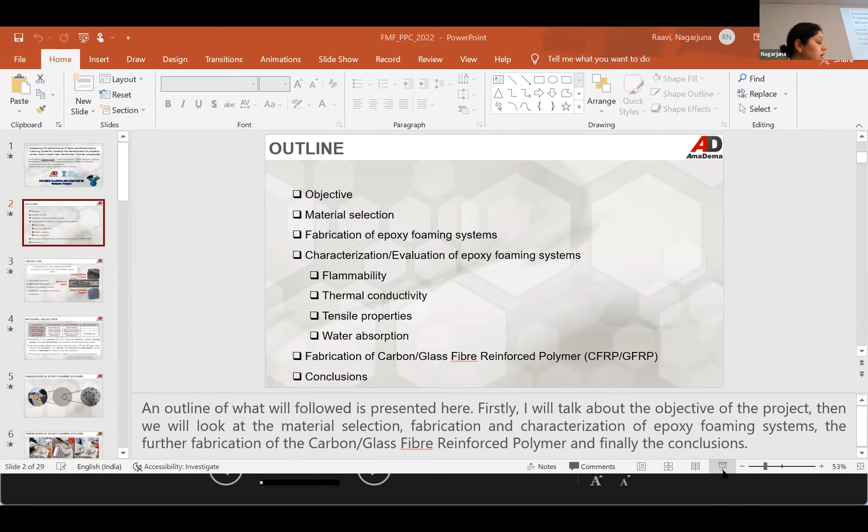To use this. Nope. I have no idea why this is not working. I'm gonna try it again. There we go.

Just a quick outline of my presentation today. I'm gonna give you the objective of this work, then move on to the criteria we've used to select these materials. Following that, I'm gonna talk about the fabrication of these epoxy foaming systems, before I move on to the characterization and evaluation of the resulting foaming systems in terms of their flammability, thermal conductivity, tensile properties, and water absorption properties. Finally, we're going to have a short look at how we can implement these as core materials in fiber reinforced composites.

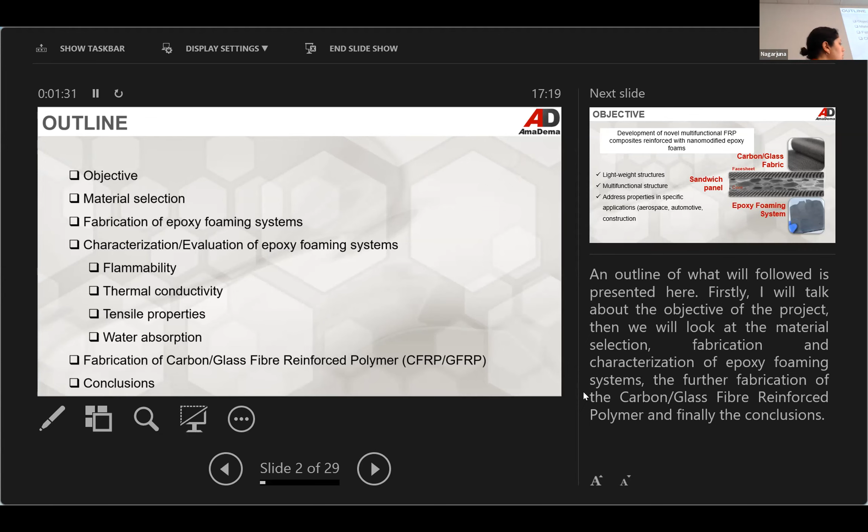The main objective of this work was to develop novel and multifunctional fiber reinforced composite systems using these epoxy nano-modified foams as a core. As you can see here, these epoxy foams with nanoparticles are sandwiched between two face sheets made out of carbon or glass fabric.

The advantage of these structures is that they're very lightweight, yet very strong. They carry several multifunctionalities, and they're typically used to address specific properties in applications such as aerospace, automotive, and construction.

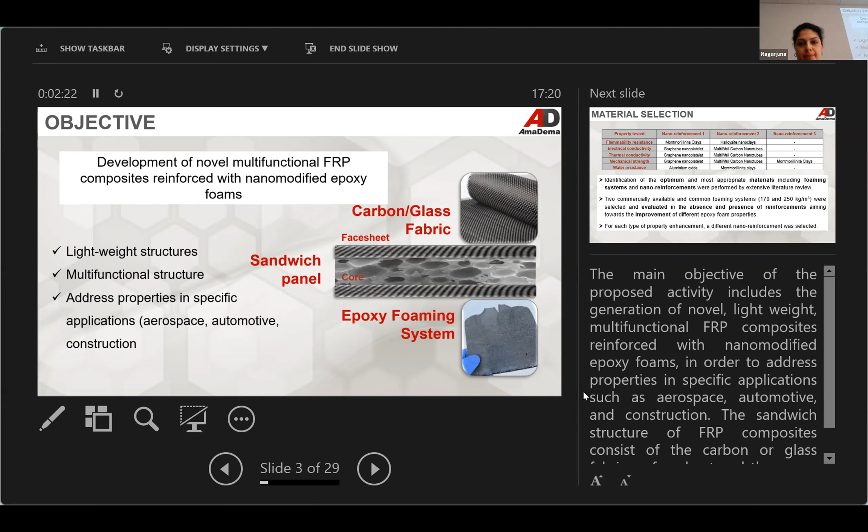Now moving on to the material selection, the scope of this was to identify the optimum and appropriate materials to give us this needed multifunctionality. More specifically, we were looking into the relevant literature to find nanoparticles that could enhance the flammability resistance, electrical conductivity, thermal conductivity, mechanical strength, and water resistance of the resulting foams.

After selecting the applicable materials, we selected two commercially available and common foaming systems with different densities. We've evaluated the performance of these foams in the presence and absence of the nano-reinforcement selected here. For each type of property, as you can see here, we've chosen different enhancements.

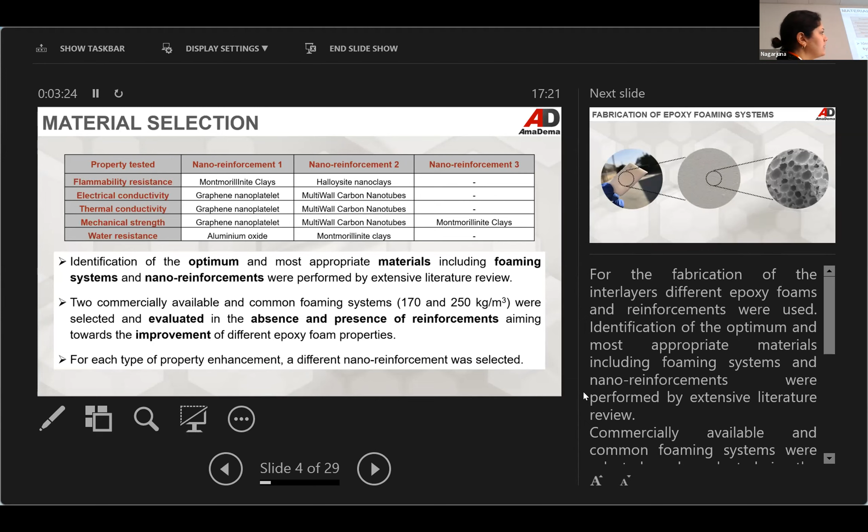In the case of mechanical strength, we actually tried 3 different systems. As you can see here, we're creating this core material, and the SEM images demonstrate that it results in an open cell structure, which is preferable in aerospace applications.

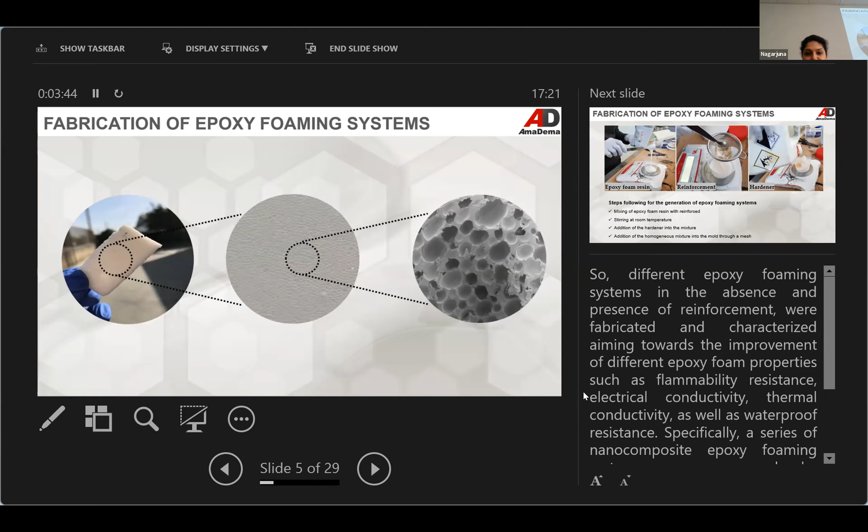Very quickly, the way we fabricated these epoxy foam systems was to mix the epoxy foam system with the reinforcement. We stirred it at room temperature, and added the hardener before transferring this into the mold. What is noteworthy here is that we were using a sieve to add the nano-reinforcements to break up any aggregates, and also using a sieve to pour this into a mold, making sure we eliminate any entrapped gas bubbles that would hinder the homogeneity of the final system.

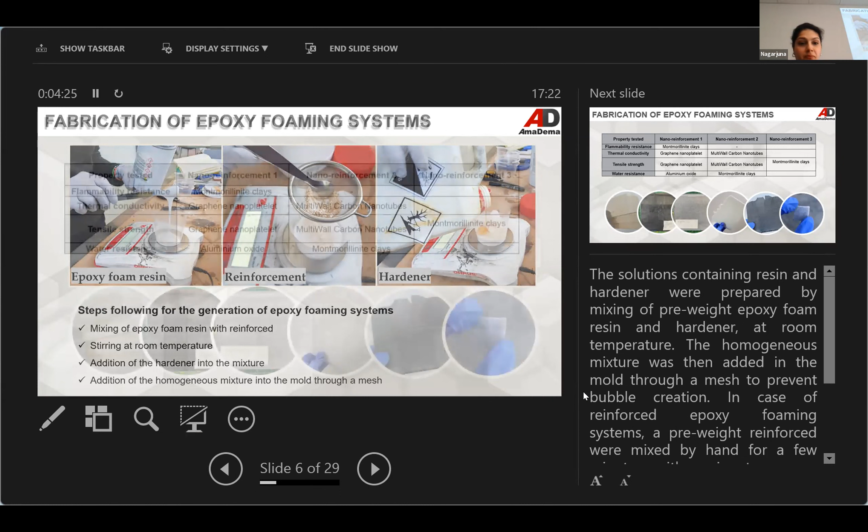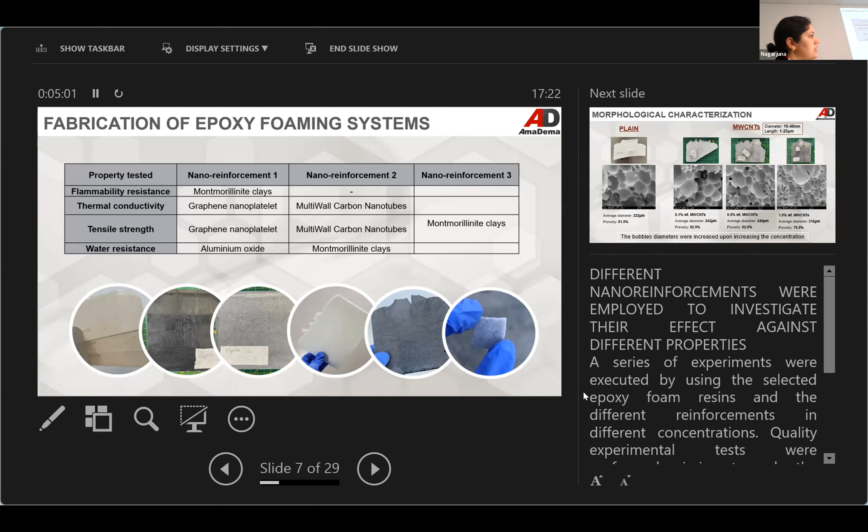Moving on to the morphological characterization, we wanted to investigate the effect of the addition of particles at different concentrations on the morphology of the resulting system. As you can see here, in the case of multi-wall CNTs that have an average diameter of 10 to 40 nanometers and lengths of 1 to 25 micrometers, we observed that the diameters of the bubbles, as measured using SEM,

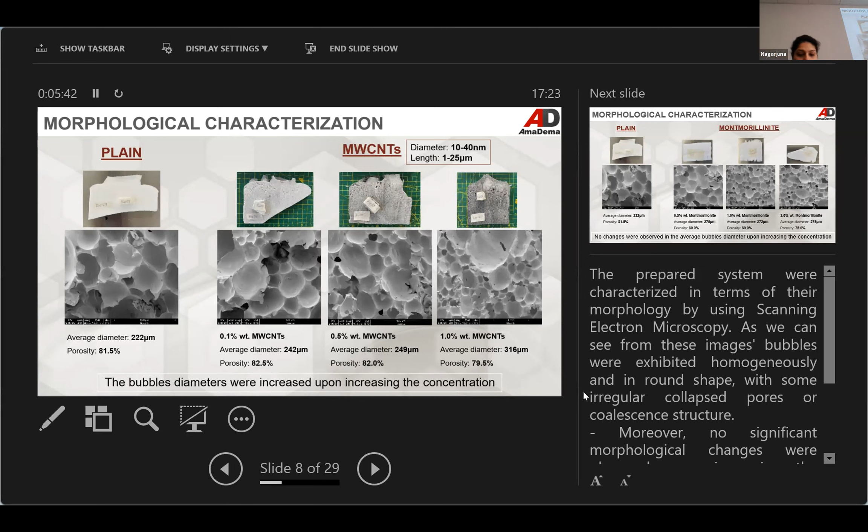appear to increase when we increase the concentration. And the porosity, as expected, drops when we increase the concentration.

Now, montmorillonite nanoparticles had a very different effect. We haven't seen a significant change in the morphological properties. As you can see, the average diameters measured were very similar, and the porosity, as expected, is also very similar.

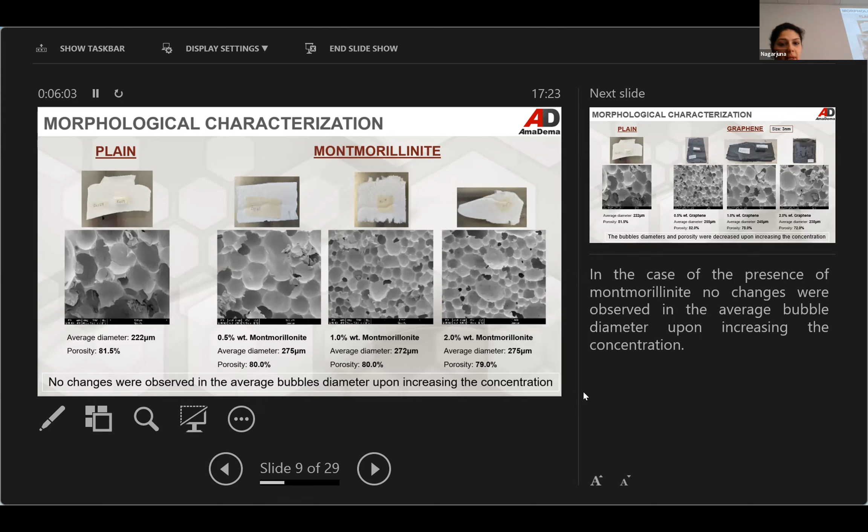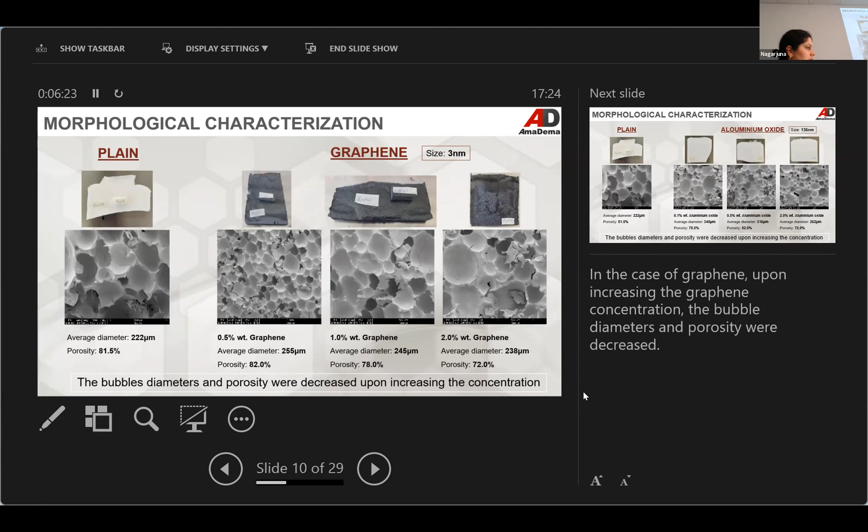Finally, when we use the graphene nanoparticles, keep in mind that these are very, very small nanoparticles compared to the previous particles we've checked. The bubble diameters appear to decrease when we increase the concentration of these nanoparticles.

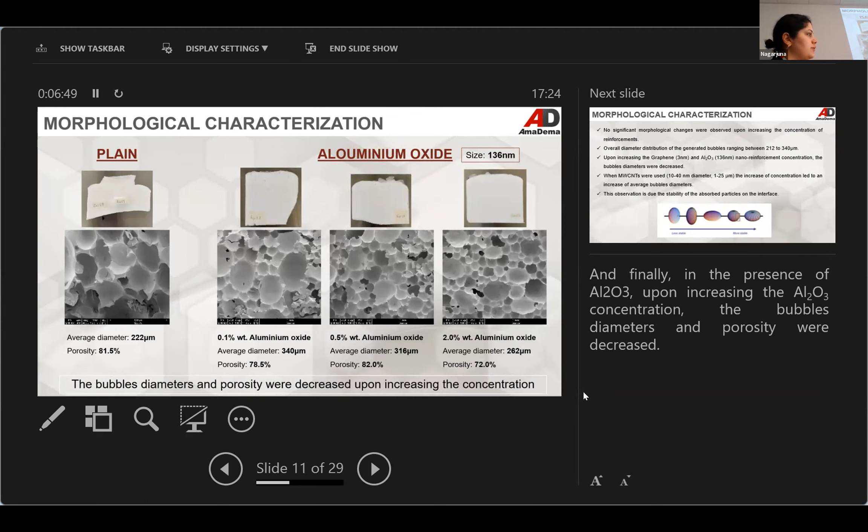And finally, the last system we've used were the aluminum oxide nanoparticles. As you can see, the size is also different here, and here we have observed the largest average diameter in the systems we've checked. Again, the bubble diameter and porosity are decreasing when we increase the concentration of aluminum oxide in the epoxy foams.

Now, a quick summary of what we have observed. We haven't observed any significant morphological changes, meaning that we started off with open cell foams, and what we got was open cell foams. The overall diameter distribution ranges between 212 to 340 micrometers. In the case of graphene and aluminum oxides, we have observed that the bubble diameters decrease. In contrast, when we incorporated multi-wall CNTs, we've seen that the average bubble diameter actually increases.

We have attributed this effect to the shape and size of the incorporated nanoparticles and their stability on the interface. So what you can see here is the different stability states when we incorporate different particles on an interface. Of course, as you increase the sphericity, you end up with more stable nanoparticles absorbed on the interface.

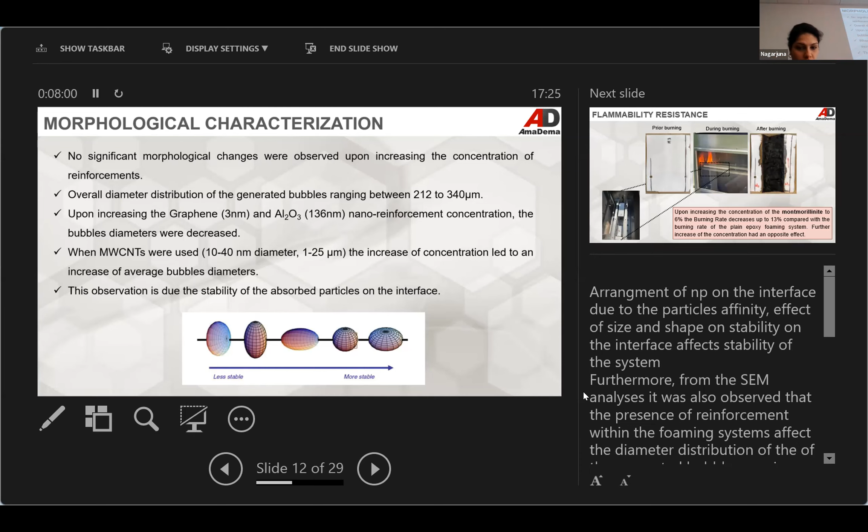Okay, the first property that we wanted to investigate was the flammability resistance. This is of particular interest in the automotive industry, since these foams can be used by the automotive industry in cars or in seats, etc.

We have seen that increasing the concentration of montmorillonite nanoparticles to 6% weight, we have managed to decrease the burning rate by 13%, which means that incorporating these nanoparticles hinders the burning rate and causes these materials to be more resistant to flames.

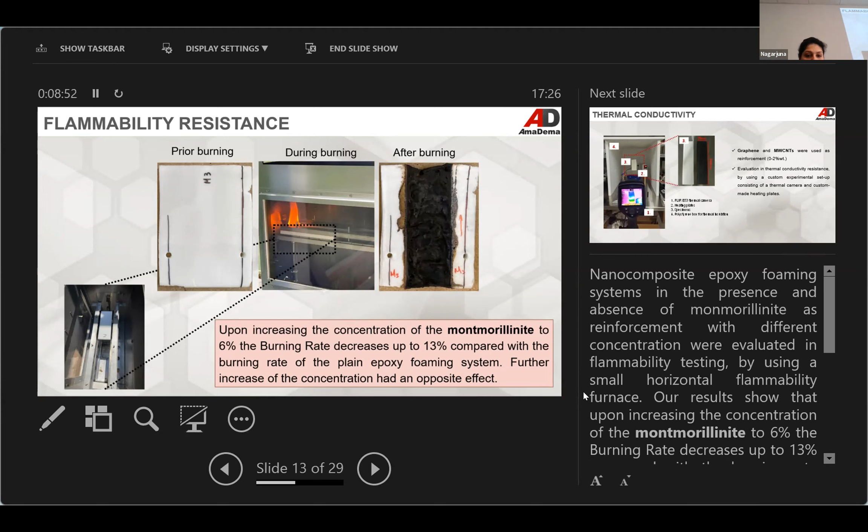The next thing we wanted to check was the thermal conductivity of the resulting epoxy foams. We wanted to see how they behave when heated, and what we used was a homemade system consisting of a thermal camera and heating plates. We're holding the sample with these heating plates, in an insulated environment. So what we did was heat the sample and investigate the temperature along the length, and of course along the time of the experiment.

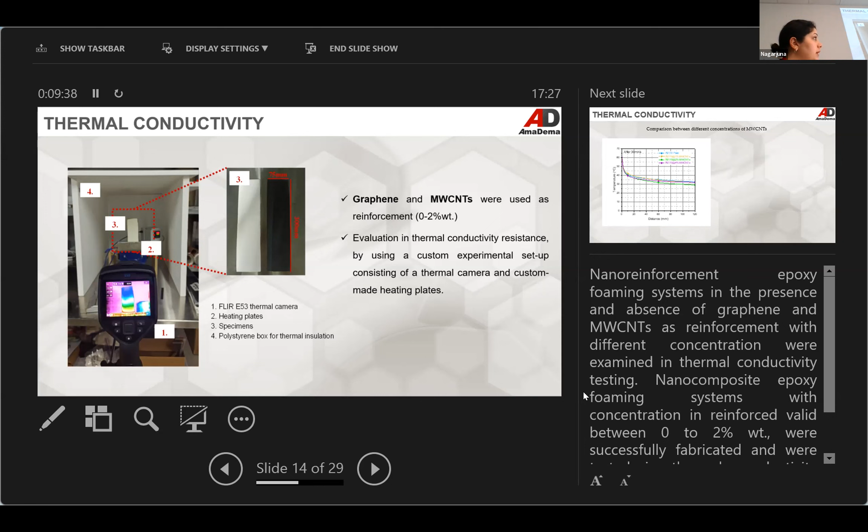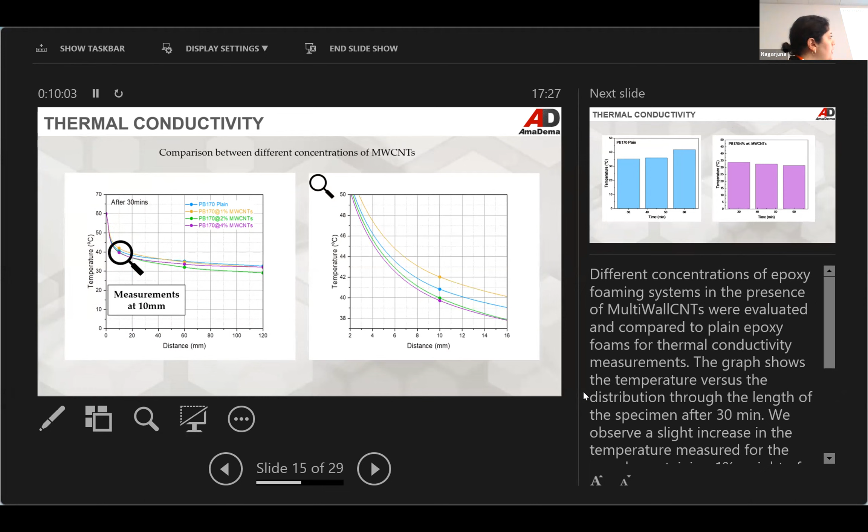For this type of experiment, we've used graphene and multi-wall CNTs, since these are conductive nanoparticles. We've ended up with this type of graph, showing temperature across a certain distance of the sample. If we zoom in at 10 millimeters from the heating plate, we see a minor increase in the case of the incorporation of 1% multi-wall CNTs.

Of course, this is not conclusive yet. We really have to investigate what is happening in terms of the heat capacity of the system, and this is what we're investigating now. But indeed, we see a small increase of the temperature at a constant distance and constant time.

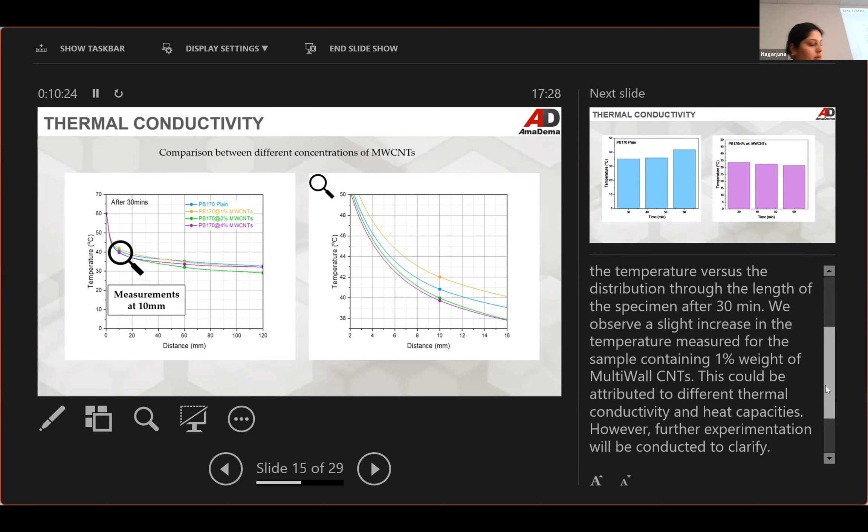Then, comparing the plain foams with the foams that had 4% multi-wall CNTs, we've seen that the neat foams have a better heat capacity. In the case of the 4% CNTs, the rate of loss of temperature to the environment is higher due to the incorporation of the conductive nanoparticles. Thus, we end up with lower specific heat capacity levels.

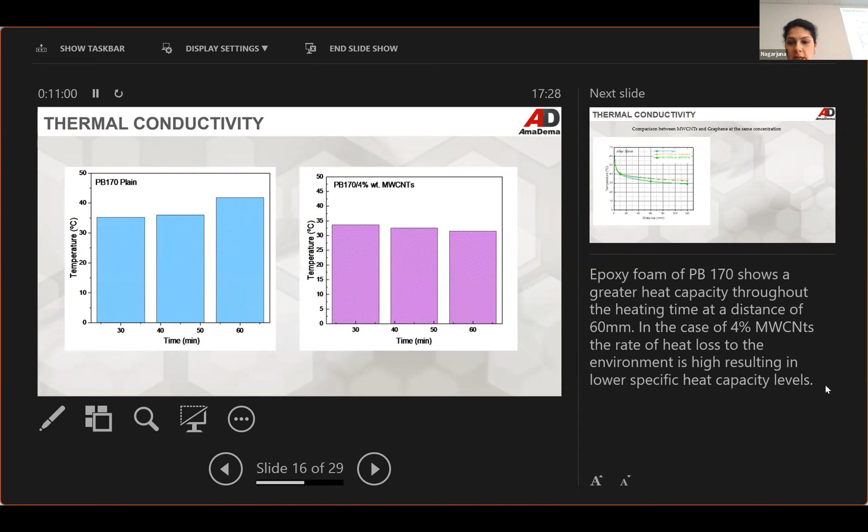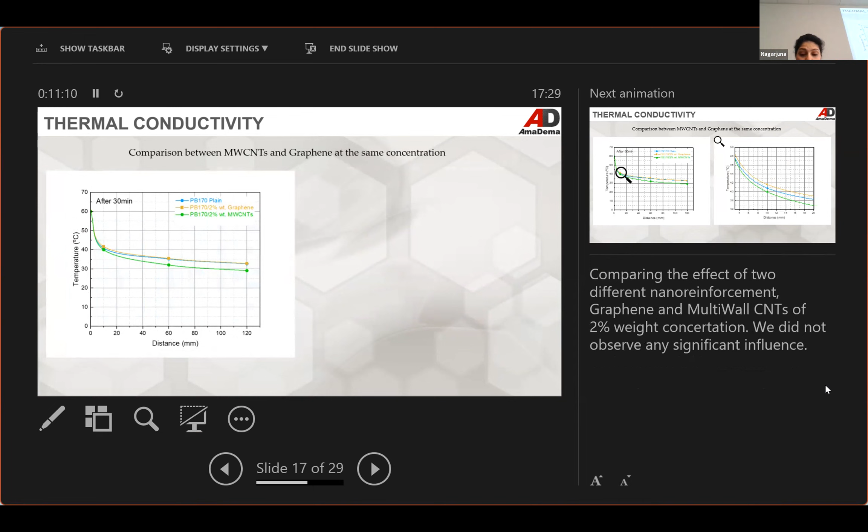However, when we compared the two different conductive nanoparticles, we haven't seen any adverse effect.

Moving on to the mechanical properties, in particular the tensile properties of the samples, we are following an ASTM standard, using a universal testing machine with dog bone shaped specimens, and we have tested these to see how they respond in tensile.

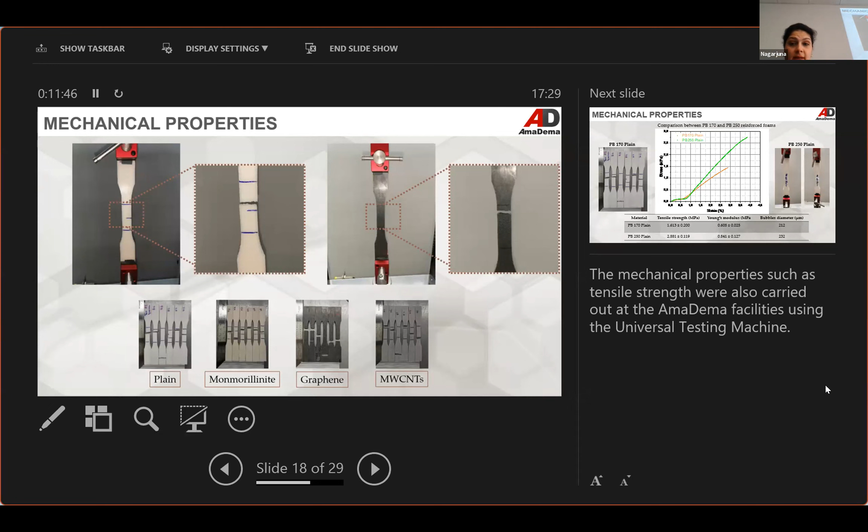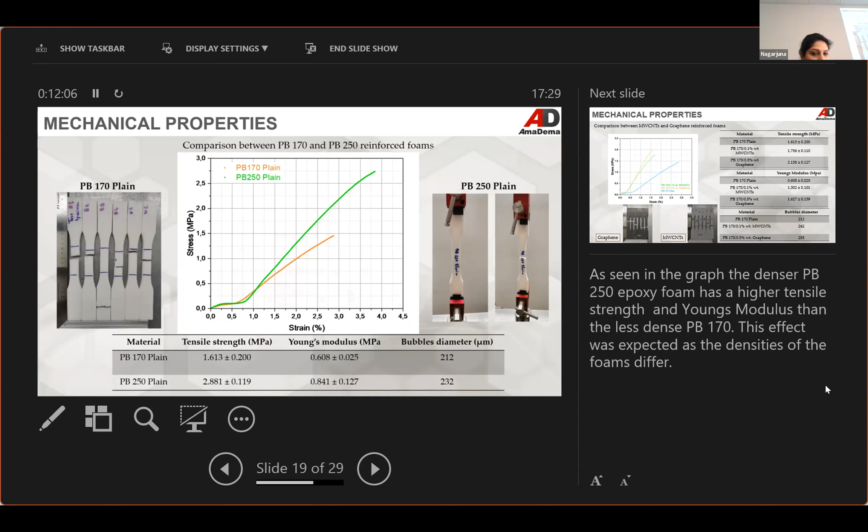What we have observed, starting from the two neat systems, is that the system with the highest density, the 250 system, demonstrates higher tensile strengths and higher Young's modulus. And of course, the bubbles incorporated are larger.

Now, when we compare the multi-wall CNTs with the graphene reinforcements in the 170 epoxy foam system, we've seen that when we were adding graphene nanoparticles at larger concentrations, the tensile strength increased, along with the Young's modulus. Again, this is in line with the increase of the bubble diameter, demonstrating that when we have larger reinforced bubbles, we tend to have stronger materials.

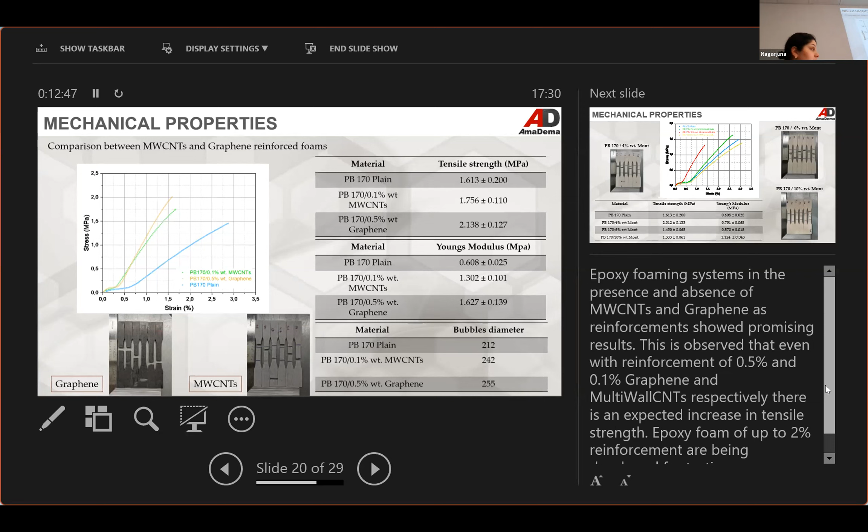Okay, the next system we tested was the montmorillonite nanoparticles at different concentrations. We have used the 170 foam to check this, and we have incorporated 4%, 6%, and 10% montmorillonite nanoclays. What we observe here is actually very interesting.

We see a percolation of the enhancement when we use nano-reinforcements. I'm sure you're familiar with this concept. It basically highlights that above a certain percentage, we do not see the enhancement due to the inclusion of nano-reinforcements, because the interactions between these reinforcements become more significant.

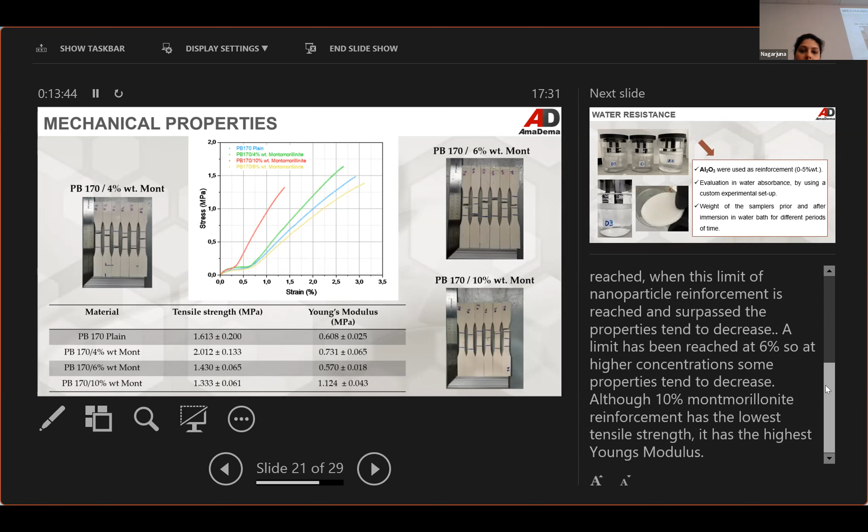As you can see here, the 10% montmorillonite has a weaker response, while the 4% actually demonstrates the best tensile strength. What was really surprising is that the 10% montmorillonite, even though it has quite low tensile strength, demonstrates a higher Young's modulus.

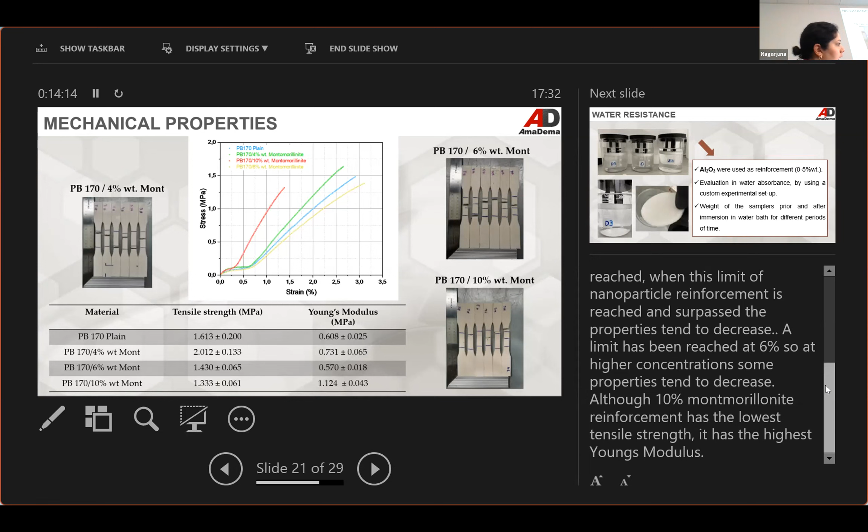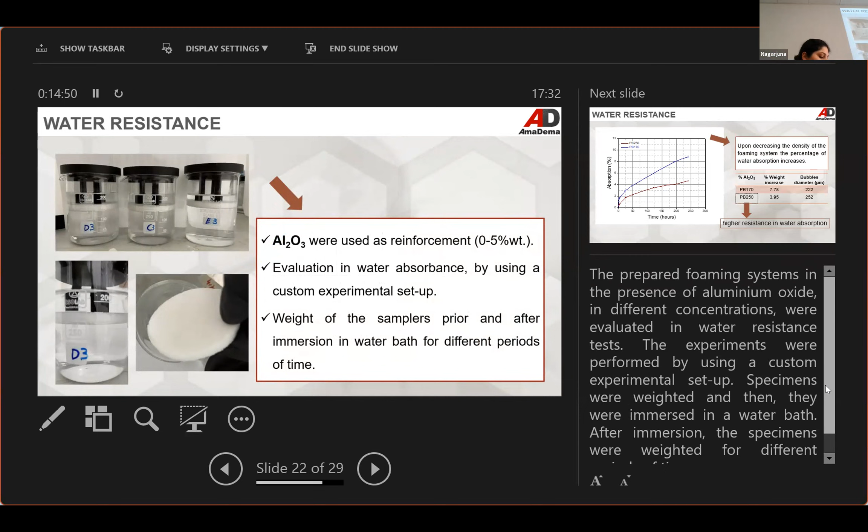The final property we wanted to investigate, again in light of the applications we want to use this in, was the water resistance. We've used aluminium oxide as a reinforcement, at concentrations ranging from 0 to 5%. Samples of known weight were immersed in water, and measurements were taken at different periods of time.

What we have observed is that when we decrease the density of the foaming system, the percentage of water absorption increases. These are the two systems we have investigated, with this system having the higher resistance to water absorption.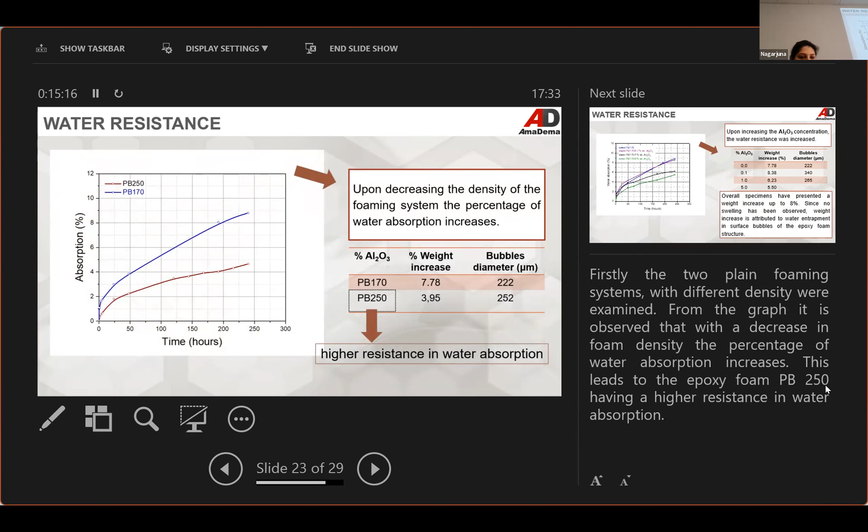Now, when we incorporated different concentrations of these aluminum oxide nanoparticles, ranging from 0.1 to 1 and then 5%, again we see that indeed the water resistance tends to increase compared to the neat system.

However, when we incorporated 5% aluminum oxide particles, we've seen quite an important drop in the water absorbed. Of course, we have to investigate this further, and we're hoping to incorporate higher concentrations to investigate the percolation here as well.

What is noteworthy is that even though the specimens demonstrated an increase in weight, no swelling was observed, and this led us to conclude that this weight increase is attributed to water entrapment within the surface bubbles of the epoxy foam specimens used, since these had some roughness to them.

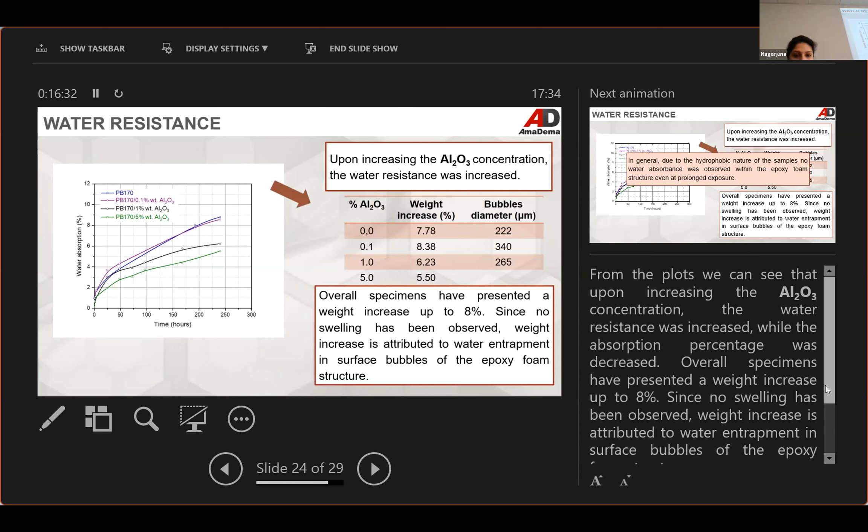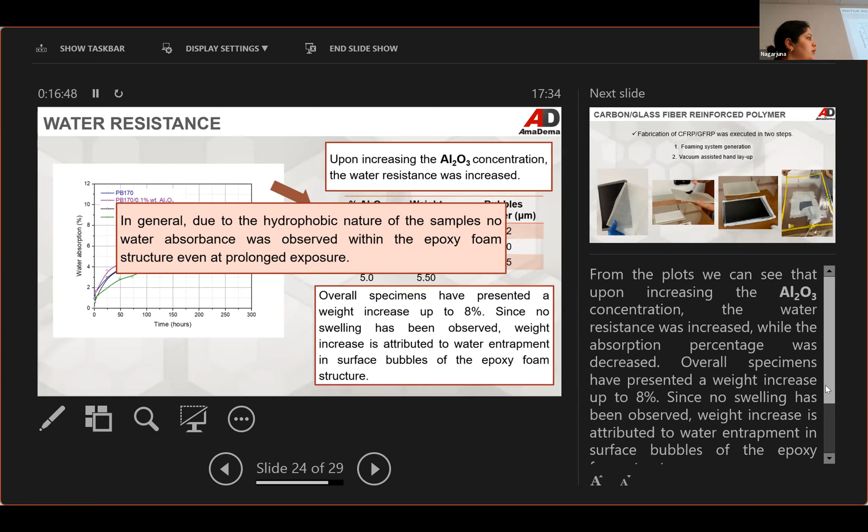In general, these hydrophobic foams do not really change when exposed to moisture, which is very good when dealing with aerospace and structural applications, of course.

As I told you in the beginning, the ultimate goal was to incorporate these foam structures as cores in carbon fiber reinforced polymers and glass fiber reinforced polymers. This was realized in two steps. The first step was to synthesize this foam in a similar manner as I described earlier.

Basically, you choose your reinforcement depending on the property you want to hit. You incorporate it into the structure, and then you cast the structure in a mold. Once this is solidified, you incorporate it as a core material within face sheets made of technical fabrics.

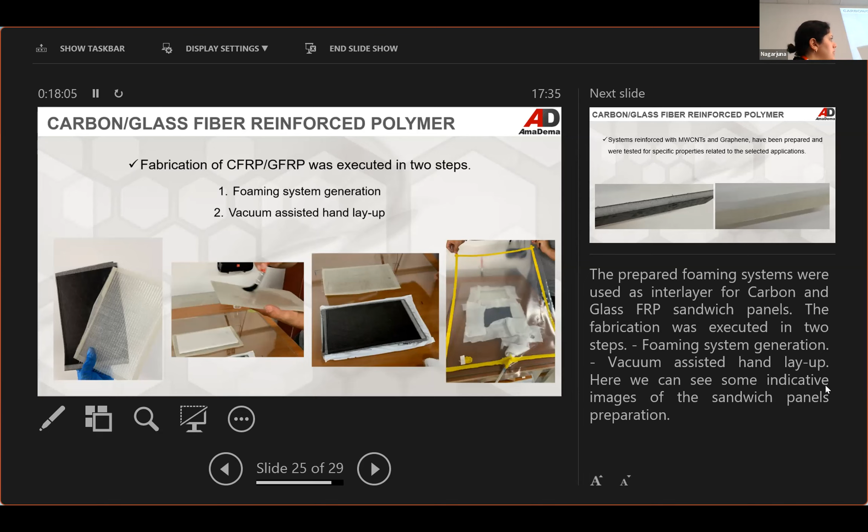Here you can see the carbon fabric and the glass fabric. The methodology we used to incorporate this is something very well known to the industry of fiber reinforced polymers: this was the vacuum assisted hand layup. So basically you cure this under vacuum.

What we have observed is that systems reinforced with multi-wall CNTs and graphene have very good affinity with the face sheets. I'm not sure if you can tell, but basically we have managed to incorporate these as cores with the face sheets that you see here in black. These are carbon, and with the glass fiber face sheets that you can see here in white.

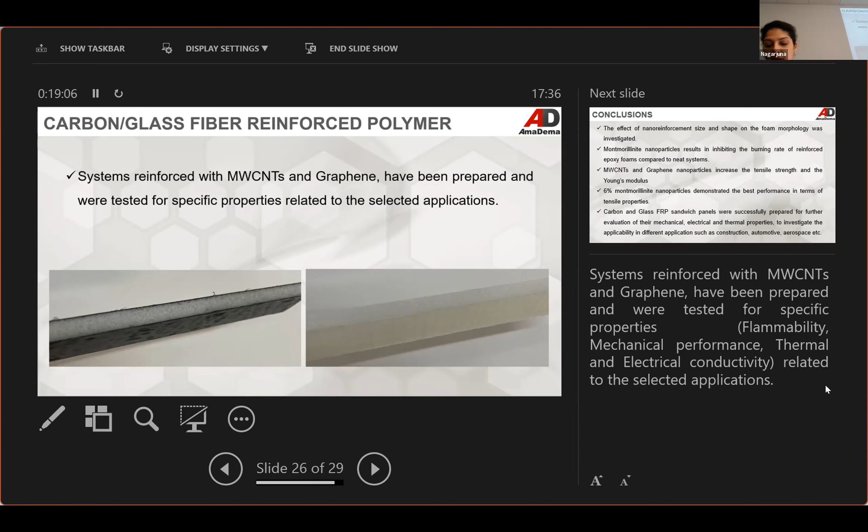This is opening the way to our next experiments, which will check the enhancement of the performance of fiber reinforced polymers when epoxy foams are used as cores. Typically, what we use as cores is aluminium honeycomb or paper honeycomb structures, and it will be very interesting to see how these compare to these conventional structures.

Just to conclude my talk today: what we have demonstrated is that the effect of nano-reinforcement size and shape on the morphology of commercial foams has been investigated, and we've actually seen differences in behavior when we use spherical or oblate nanoparticles.

We've seen that the montmorillonite nanoparticles result in inhibiting the burning rate of the reinforced foams, meaning that this could find applications in the aerospace or automotive industry where flame resistance is desired.

We've seen that the incorporation of conductive nanoparticles increases the tensile strength and the Young's modulus, and even when nanoparticles are incorporated, the tensile properties of epoxy foams tend to increase.

Finally, we have successfully prepared carbon and glass fiber reinforced polymers, and these will be used to further evaluate the mechanical, electrical, and thermal properties, and check how this would be applicable in construction, automotive, and aerospace industries.